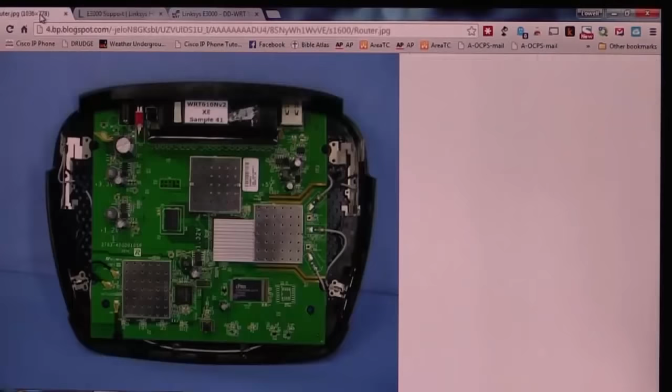So if you were to take it and crack it open, you take the 4 screws out of the back, this is what's actually inside. What we have here is a series of antennas. Over here we actually have 3 antennas, and they look very flimsy and cheap, and they are, but believe it or not, there is a tremendous amount of science and engineering that goes into their specific design.

So although they're just stamped metal with attachments, they are very thoughtful, carefully engineered pieces of metal that function as very precise antennas. We have antennas for the 2.4 gigahertz frequency range, and antennas for the 5 gigahertz range. Inside also, you've got a couple of metal shielded areas on the circuit board, capacitors, inductors and a couple of other things.

You got a Broadcom chip here that takes care of the switch, a 4-port switch. There's also an embedded chip here that's got Linux embedded. This is much like your firmware on your motherboard. It also has another chip designed for the 5 and 2.4 gigahertz radio. Here you can see the leads coming in. You got 3 leads coming in.

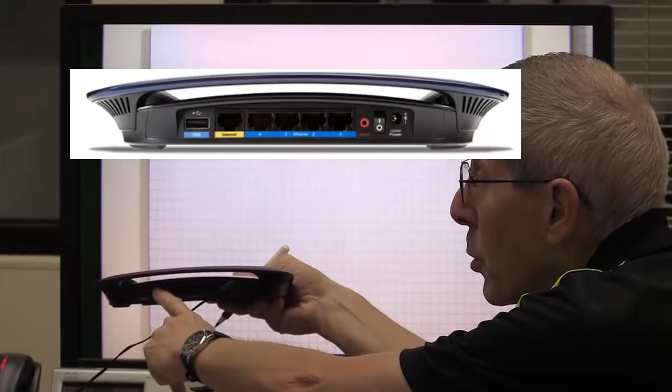Let me identify it. This yellow connector is what we call the internet connection. Most of the things I'm going to draw on this piece of paper are all inside. You can't hold it up or twist it around and see them. One of the things you can see is this port right here, and I'm going to identify that as I begin to draw. So one way I could draw this device is like a server.

In reality, this is a server with two network cards. This is a NIC, and this is a NIC, and this is a Linux server. Everybody okay? This is the internet connection right here. When I point to this network card, I'm really talking about that yellow internet connection. Inside the Linux is all kinds of functionality, and we're going to get into that. Then on the other network card, we go out and we have a switch.

And I want you to look very, very carefully when I draw this switch. Let's say this is 1 port, 2 port, 3 port, 4 port. And you're going to notice, in my crude artistic talent, I have drawn 4 ports on the switch, but I'm going to show you there are many more ports, but they are not visible and not accessible to you.

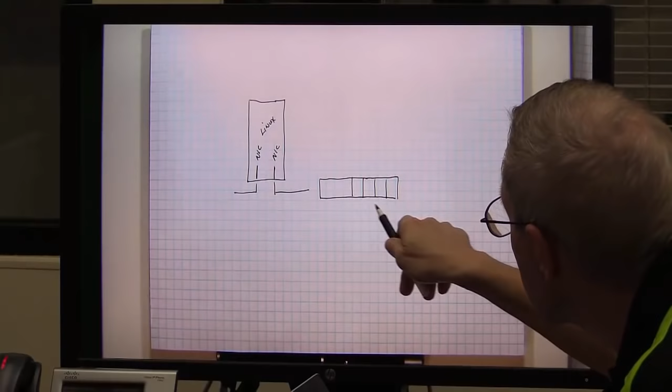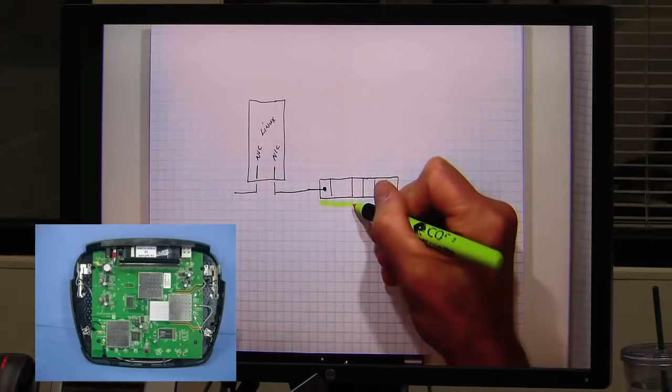So the Broadcom chip that allows us to have this switch, it has many other ports, but they're connected to other devices. So one of those is connected right here. So we've got a patch cable from this NIC to this switch port. This one you don't see. So all of these switch ports that I'm going to draw right up to there, you do not see these, okay? They're internal. Everybody there? They're there, believe me, if we go trace the circuit board, we can find them.

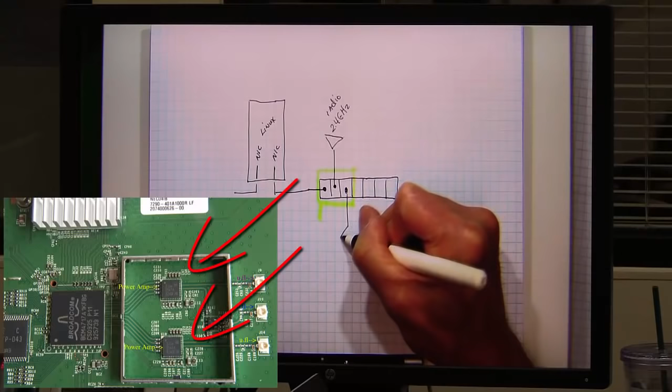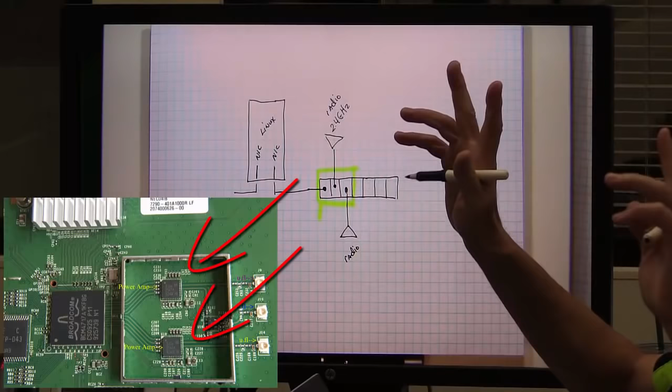The other is we're going to have a 2.4 gigahertz radio. And we're going to have what? A 5 gigahertz radio. Yes, we are. We're going to have two radios, and this is very typical with most multifunction devices you buy today; they come with what they call dual band. What does that mean? That means you have 2 radios. So this is a 5 gigahertz radio.

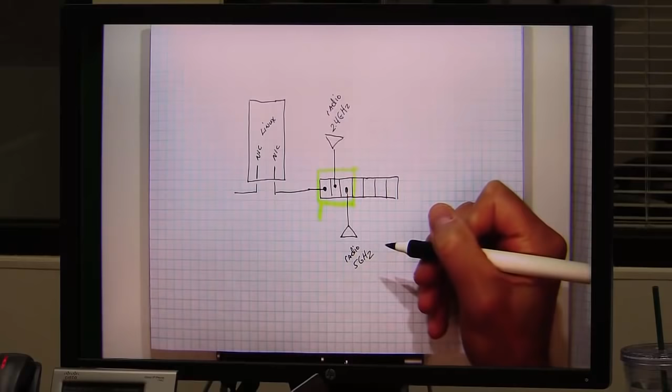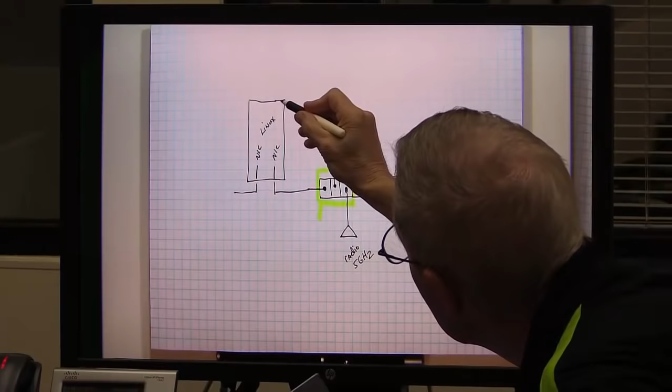So in reality, you have wireless access points or radios, you have a switch, and then you have a fully functioning Linux operating system. And a lot of our functionality is going to happen right there in Linux. Then we have 2 network cards, and this is where we connect. We will connect to our ISP box. Let's say this is the box that the ISP brings in. This could be Bright House, this could be Comcast, this could be CenturyLink. So it could be a number of ISPs.

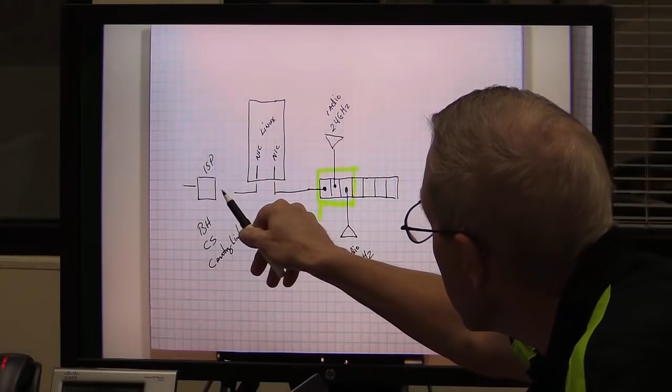They're going to bring some kind of device to you, and you're going to connect an RJ45 to their box and then to the first NIC of this Linux server. And that is represented by that internet port right there, okay? So I want you to understand, in reality, that drawing is more accurate than any other drawings that I'm going to do. But you still don't really understand it. But that is really what you got. Inside that plastic box, that's it. Now, inside Linux is going to be a lot of additional functionality.

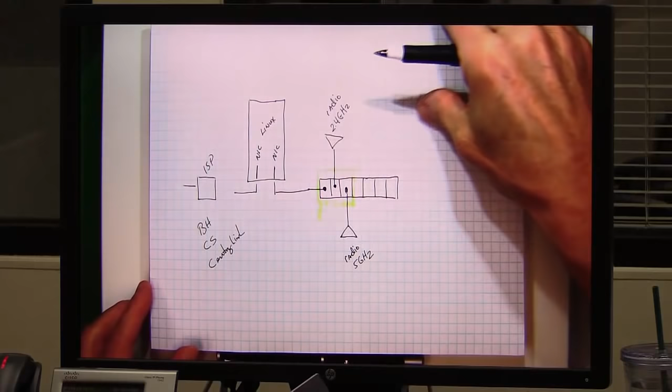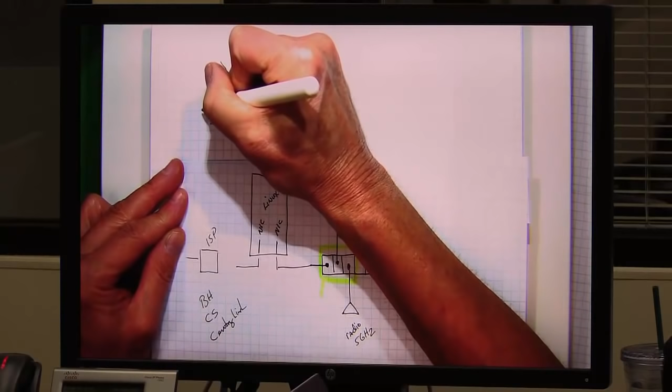So let me break down what's happening inside the Linux server, if I may. I'm going to keep this here so you can still see it. And I'm going to start drawing in more detail logical blocks. So number one, we have a router. Everyone understood that there's definitely a router involved, but prior to the router is a firewall. Then there is a router. And this, by the way, is our yellow internet connection point. Out of the router, we have a DHCP server.

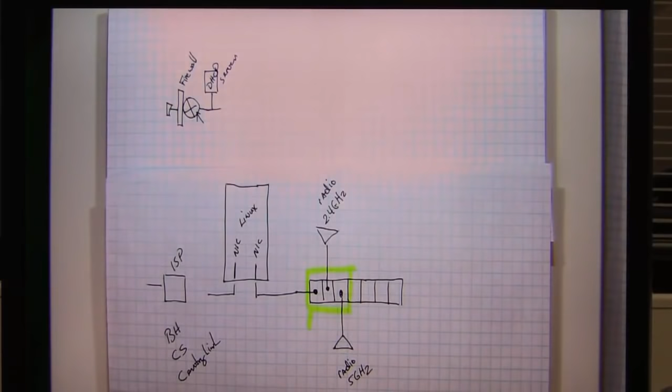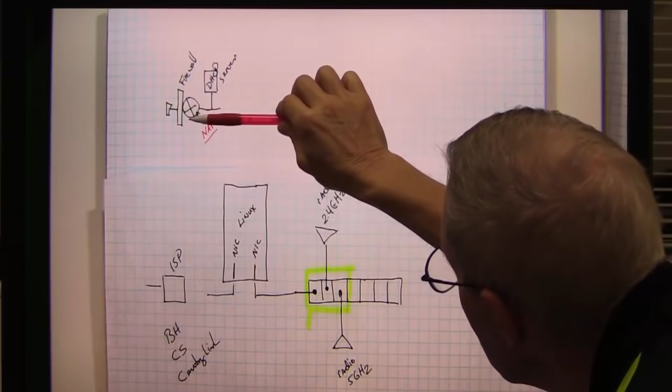We also have functionality inside this. Let me change colors, that will help just a little bit. Inside the router is also our NAT, our network address translation table. So inside this Linux operating system, we're gonna have a firewall, a router, a network address translation table, and a DHCP server. All of that functionality that I just showed you logically is where? Right inside that Linux operating system.

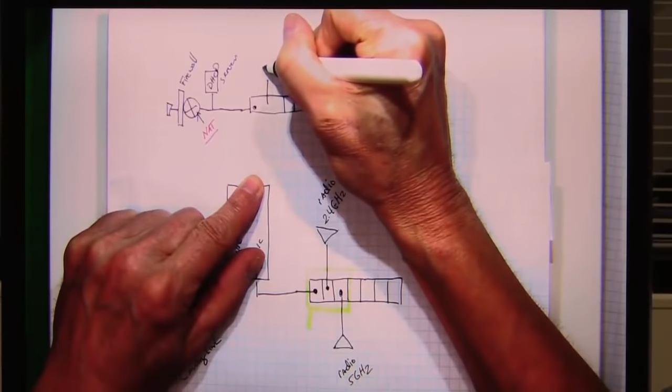Then we're going to get into our switch. Again, 4 ports are exposed so you can see them. The rest of those switch ports you don't see. This is the 2.4 radio. This is a 5 gigahertz radio. And so now I've broken the multifunction device into even more logical construction. All of this functionality is actually part of the Linux operating system. And this is embedded Linux. So really everything that I show here is all inside that Linux operating system.

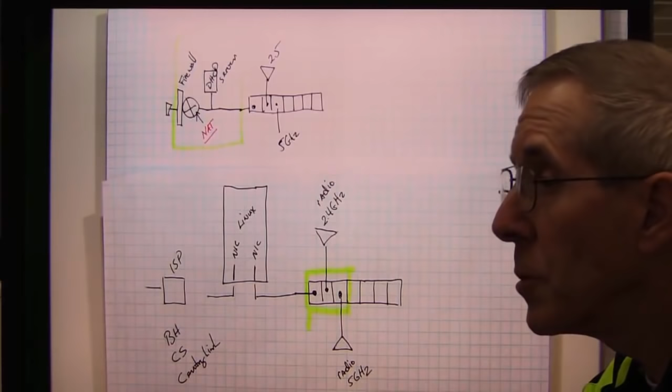So you can see we're talking about a firewall, a router, network address translation, DHCP server, a fully functional switch. This is a layer 2 switch. We see 2 radios, and that is what you buy for $90. It's all built in. It's incredible.

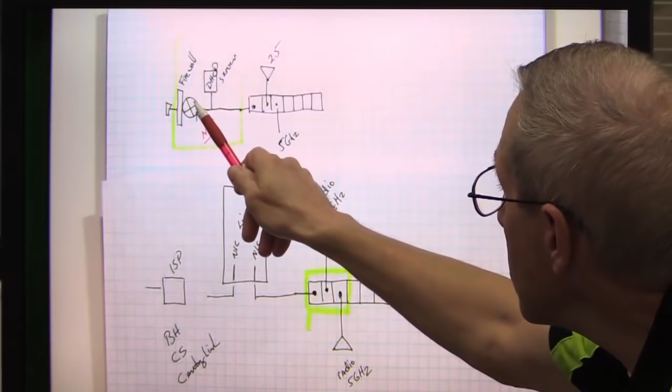Now, we have all of these pieces of equipment on our campus, but they're separate. In other words, we pay $3,000 for that device right there. Ouch. In fact, this functionality is built into our $3,000 router. So our DHCP server on this campus here at Winter Park Tech is actually built into our $3,000 router. And we have a lot more functionality in our router.

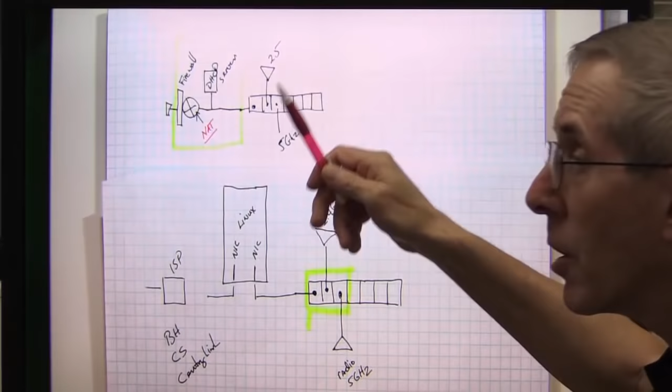Our switches are all over the campus, okay? Our cheapest switches probably start at about $3 grand each. And we have probably 30, okay? Chunk of change. So our switches run about $3,000 a pop. They're usually 24 port, 48 port, depending on the one you buy. Our wireless access points are individual. We have them up on the ceiling in the lab.

So whereas when you buy this, you're buying a multi-function device with a lot of the same components that we have on this campus, but they're integrated, manufactured at an extremely low cost, and given to you. Now, here's the beauty of all of this.

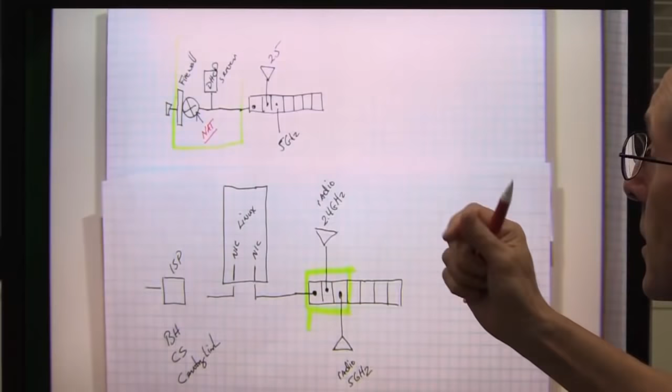If we would walk back in time 15 years ago, you guys didn't have this. You really couldn't study networking at home. Guess what? Now, with a multifunction device like this, you can study networking as much at home as you do here in this campus. That is a huge leap for the student technician who really wants to start understanding networking. How do wireless access points work? How do DHCP servers work?

Because 15 years ago, you couldn't have this, okay? 15 years ago, you were dialing up to AOL, okay? I remember that. 15 years ago, you were dialing up to AOL and you were happy. I would not be happy today to dial up to AOL. So today, you actually have all the major components that today's basic network systems have, and you have it for $90. Or if you're real cheap like me, you can buy it used or refurbished at half that price.

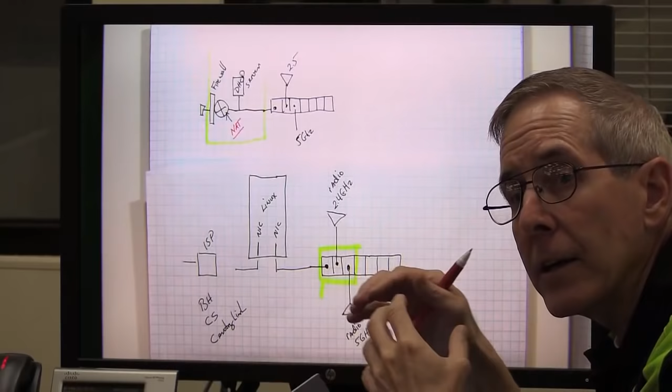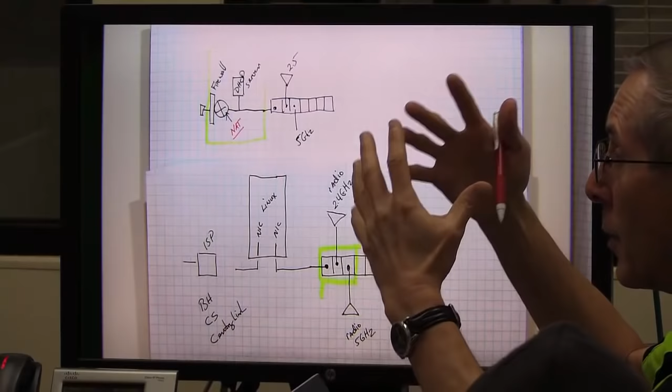So what was very difficult for you to study and learn and grasp 15 years ago is now something you can do very readily with very inexpensive components. So now I'm going to talk a little bit about these components, and then tomorrow we're going to start delving into the software. How do I look at the software so that I understand what component I'm working on and what component I'm dealing with? So let's take a look. I'm going to go back up to my

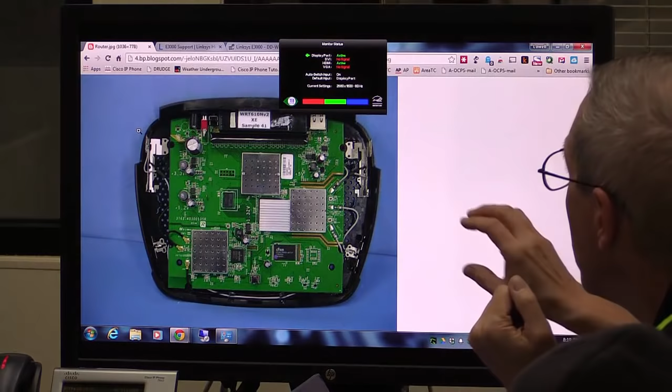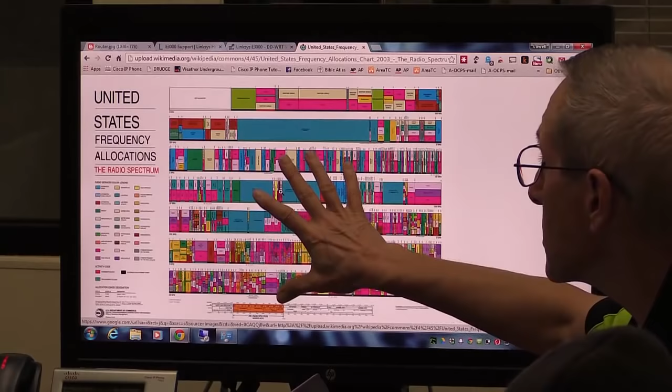Those antennas from radio, they have specific functions. I mean that they are different frequencies because of something, right? That is correct. So there's a frequency spectrum. So if we go look at radio spectrum, here's the United States. Let's go view the image. This is all the spectrum of radio transmission that is allowed in the United States. And notice it's pretty carved up.

If you look at this legend over here, you would see that the red is mostly probably the U.S. government. The military owns a huge amount of spectrum. There are slices of radio spectrum that are given to the public. Very little is given to what we call unlicensed public spectrum. In fact, 2.4 and 5 gigahertz are one of the few areas on the radio spectrum that are unlicensed. You don't have to have an FCC license to work on the gear, to set it up and configure it. Anybody who works on these other frequency spectrums must be an FCC licensed technician.

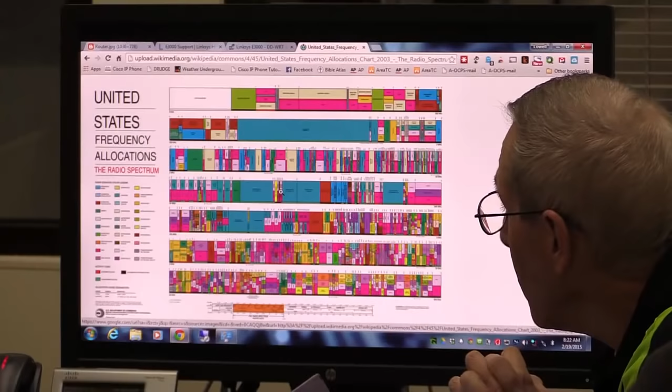You get to work on 2.4 and 5 gigahertz frequency spectrums where they're unlicensed and unregulated and open to the public. So radio control planes, drones, everybody in the world is in your 2.4 or 5 gigahertz spectrum. So in that radio spectrum is where we can transmit radio. Everybody else is either owned by the government or buys it. AT&T owns a chunk of this, T-Mobile owns a chunk, Sprint owns a chunk. But out of the spectrum you can use, they own very little, and they pay big bucks to own it. Most of that is U.S. government, satellite, weather. The Defense Department owns probably 80% of all spectrum. Okay?

So those antennas that we're looking at are precisely designed. I mean, listen guys, the guys who designed this stamped metal are brilliant people. When you talk about an antenna engineer, you're talking about one of those species of humans that, go look at an RF Engineer magazine and look at the math, the stuff that they talk about. It's way above the normal human being. These guys are bright. Just because they make it out of stamped metal and extremely cheap doesn't mean it's not incredibly bright people designing it.

So these are designed precisely for 5 gigahertz and 2.4. And although they're made of stamped metal, trust me, every element of that design is very precisely done. Okay?

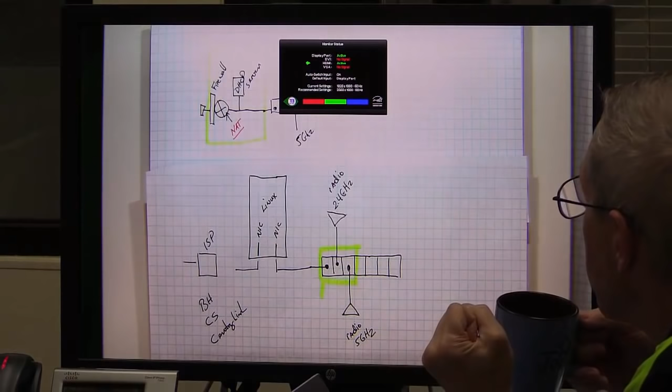You can see that we've got a couple radios. There's your switch. All your antennas are internal. It's got a 4 gig switch port that's available from the outside, and it has a USB, and we'll talk about that in a little bit. So that is the functionality. That's what's going on inside. So before I go on, let's go take a look at this. I just want to make sure that everyone feels comfortable with the drawing. Anything about this, come on, you can do it, I know you can. Anything about this that you'd like to ask questions?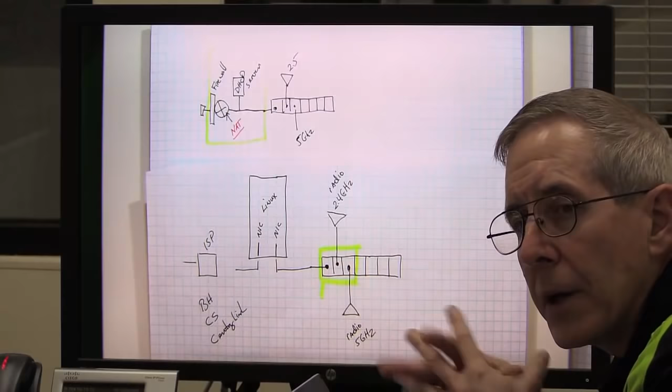So is it a good idea to unplug it, wait a little bit and plug it again to restart everything, or if it's working good, just leave it like it is? Great question. If I'm gonna go away for a week, I'm gonna probably unplug it. But generally, maybe once a month, unplug it, force it to reboot, force it to reset. But this Linux embedded operating system is so stable that you rarely have to reboot it. They use the same thing in the ISP box that you get from Bright House or CenturyLink; they use embedded Linux in that also. It's just a very, very stable operating system.

They use a very similar type of embedded Linux in this box that they use in this multifunction box. So generally, no, you don't really have to do anything. I just purchased a brand new multifunction device, and I'm having to reset it about every 4 or 5 days, which is very aggravating. That tells me something's wrong. So I gotta get it ready and I gotta ship it back. So you really should not have to reboot it or reset it, but just maybe once a month. I would do it just to flush it out and reinitialize everything.

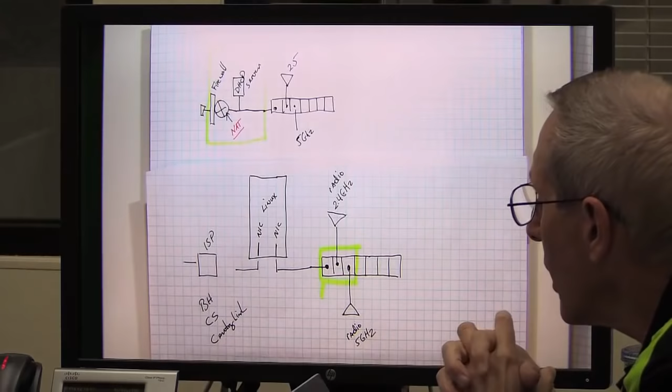Any other questions here? All right, so let's go back here. We talked about the OSI layer, and I want to show you where each of these components is in the OSI layer. This is the physical layer. This is the... I'm waiting. Data link layer. This is the... they're flying. I'm sorry. This is the network layer. This is the transport layer. This is the session layer. Presentation. Very good. We're getting it, slowly. And our application. So this is our OSI model, 7 layers.

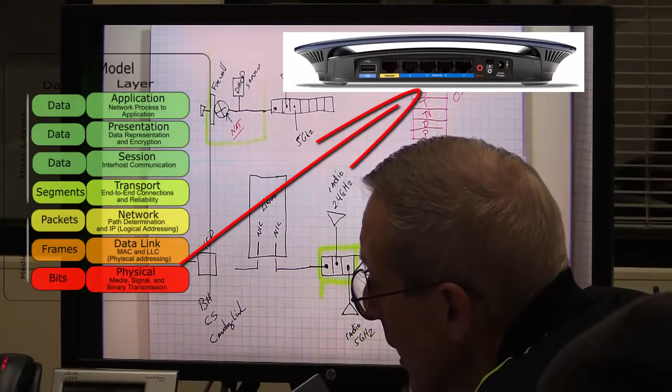This is physical. So I want you to look at this multifunction device and tell me what is at the physical layer. Hardware. Exactly. We see the jack right here. Everyone see that? So this jack would be at layer 1. What about these other jacks? Yeah, they're really at layer 1. All the jacks, the external jacks, are going to be at layer 1. So that type of stuff is going to be at our physical layer.

What about the data link layer? What components are at the data link layer? Okay, so let me help you a little bit. Network interface. All switches. So this is a switch. This is going to be found at the data link layer. This is a layer 2 device. So switches are layer 2 devices. Anything else at layer 2? I'm just throwing it out there. You're not supposed to know this. I'm just polling to see who.

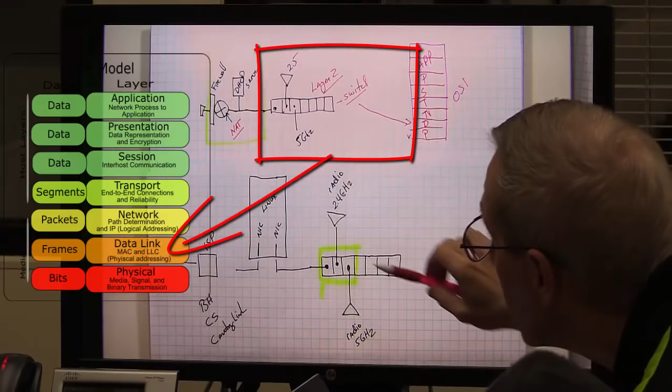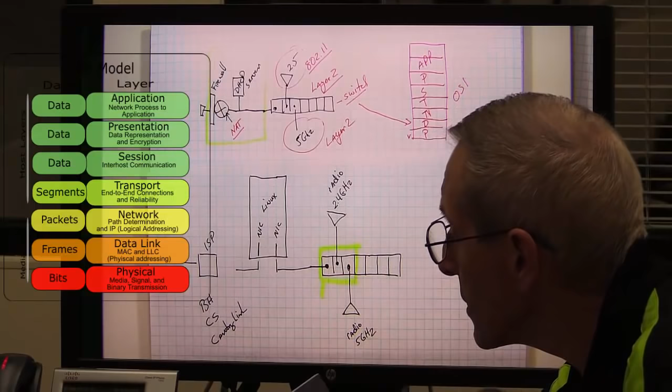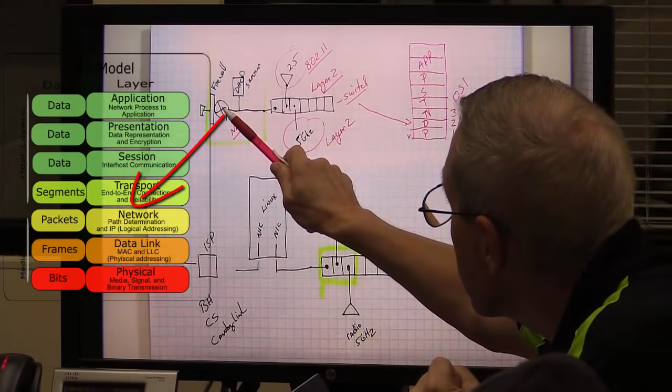Okay, another layer 2 device are those radios. Those radios are 802.11 standard. All of your radios are layer 2. So when you think of wireless, listen to me carefully. Wireless is layer 2. All your switches are layer 2. So physical: jacks, plugs, cables, all your Cat5 cables that you plug in, all of that's the physical layer. What about the network layer, layer 3? What's at layer 3? DHCP server. Not yet. Network interface. Let me tell you what definitely is layer 3, and that is your router. Your router is always going to be layer 3.

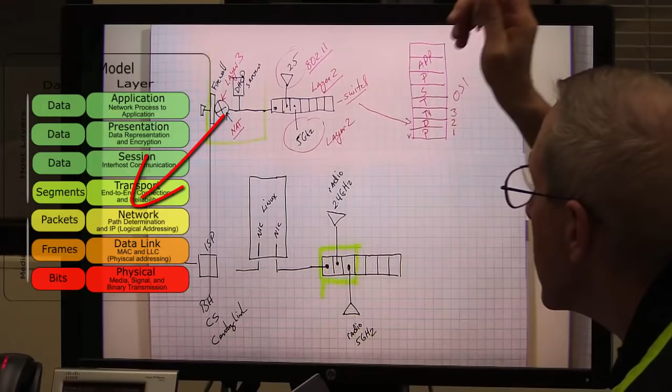Good question. A comment was, is NAT layer 3? You know, that's a great question. Where do you think the firewall is in the OSI layer? Any guesses? Session. Application. Actually, this particular firewall that's in your typical home router, your typical home multifunction device, is going to be a multi-layered device that's going to cover from data link layer to application. So you're going to be able to control what goes in the data link layer, the network layer, the transport layer, the session layer, the presentation, and the application. So this firewall is pretty inclusive. So when we look at the various logical components, that's where they fit in the layers of the OSI.

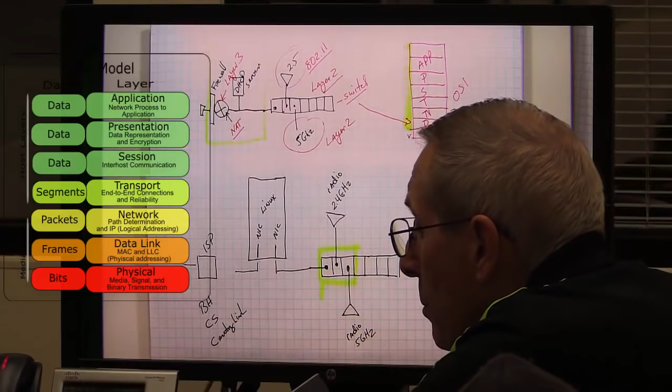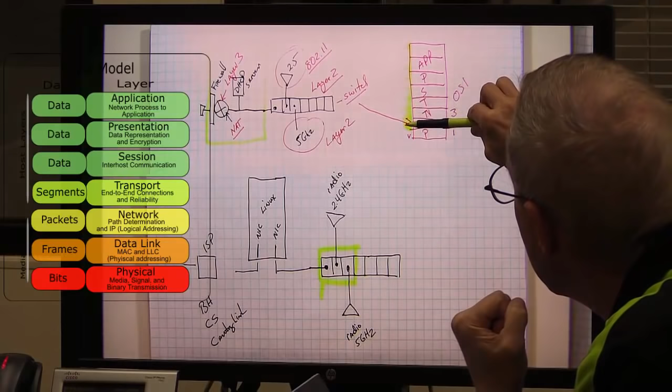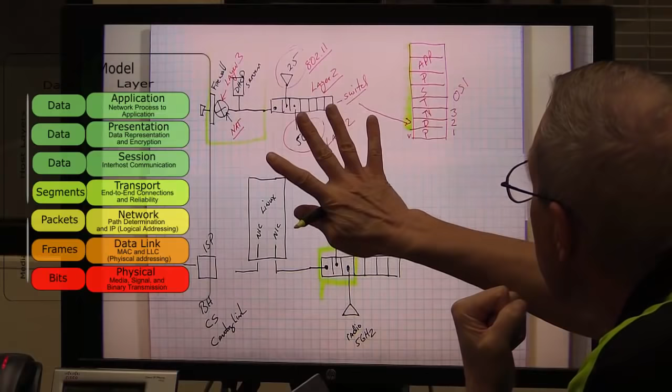Data link layer plays a big role in the multifunction devices because it represents the switch that's actually behind those connectors, and those access points. We call these WAPs, wireless access points. So layer 2 is switches, access points. Layer 3 is definitely the router. Remember, router is going to be layer 3. As we get into the other functionalities, firewall spans a number of layers from data link layer all the way up to application. So it is going to allow you to control what goes in at those various layers. And that is a good picture of most of these devices.

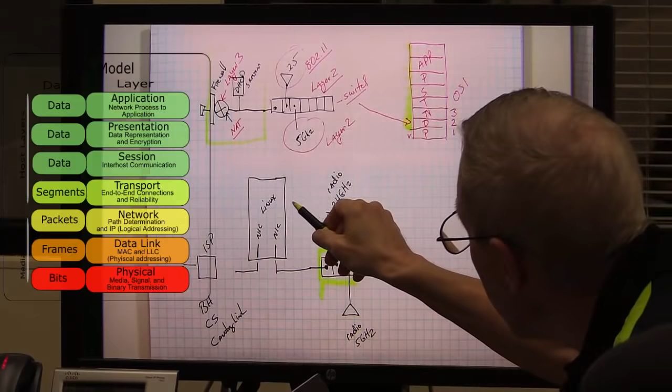Now, today, because Linux is the main operating system that's running typical multifunction devices, as vendors try to compete one against another, they're adding more and more Linux functionality to your home router, okay? So since they're using Linux, and Linux has lots of functionality and features, one of the ways that I can differentiate my router from brand X is I begin to add more Linux functionality to your home router.

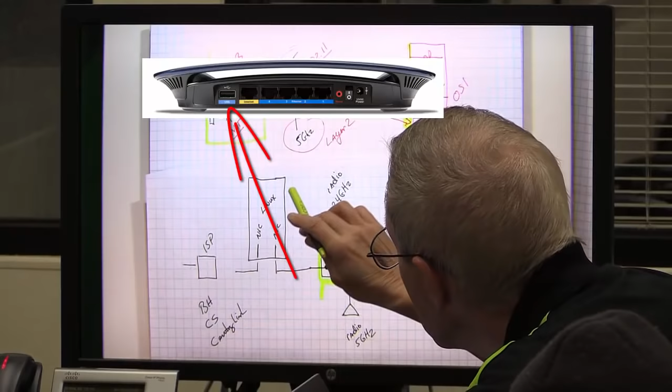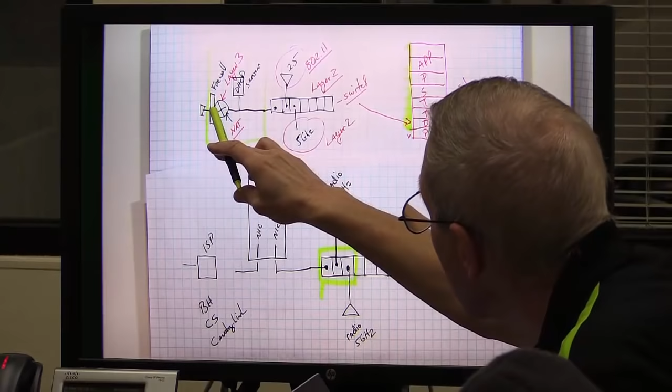This is where the USB device connector is. These devices give you the ability to take Linux and get all this functionality, a DHCP server, a firewall, a router, and now they're also going to produce a Windows server. So we use Linux to create a Windows server. I can plug an external hard drive right here, put my videos and music on it, hang it off the side of this router, and everyone in the home can access those files just like a server does. Remember servers and shares?

We're going to tell Linux, I want you to act like a Windows server. How do they do that? We talked about this before. How does Linux act like a Windows server? What does Samba do? Samba is an open source software that, when you install it on Linux, makes it look just like Windows.

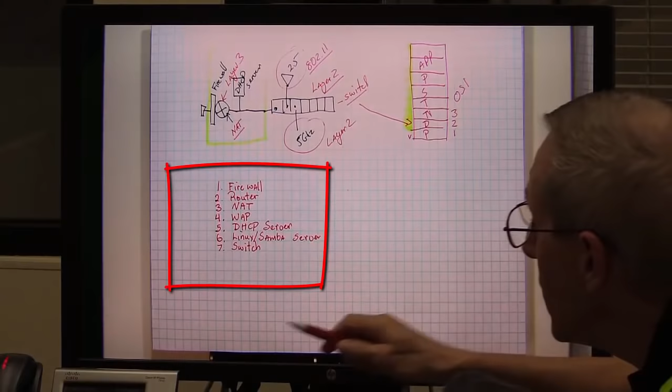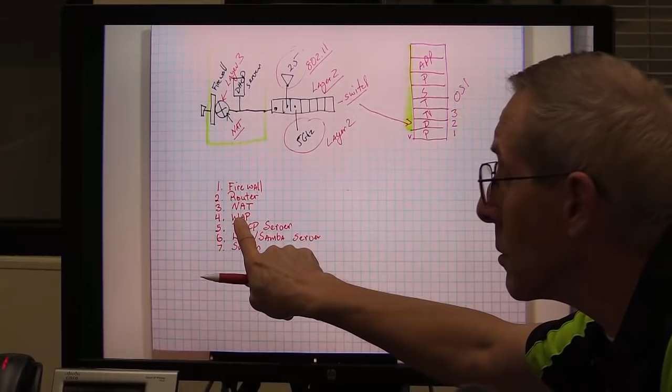So that is the logical components in your typical multi-function device. Now, depending on the price you pay, you may get better functionality in these areas. So if you buy the latest, greatest ASUS router, multifunction device, you may get a much better radio, a much better access point.

If you buy less expensive ones, for example, I buy at least one very inexpensive multifunction device, and I just keep it as a spare. So if my one that I live and breathe and die on dies, I can take my cheap one and stick it in temporarily till I can go out and get one. Otherwise, my wife would kill me. She can't have her iPad, I'm dead meat. So I've got a spare ready to go. It's all set up and configured. All I gotta do is plug it in and go.

How long do you normally keep those for? That's a great question. I probably wouldn't keep them any more than 3 years, because in a 3-year period of time, the radio technology, the router technology, the Linux technology has so radically improved and changed, it's worth it to buy a new one.

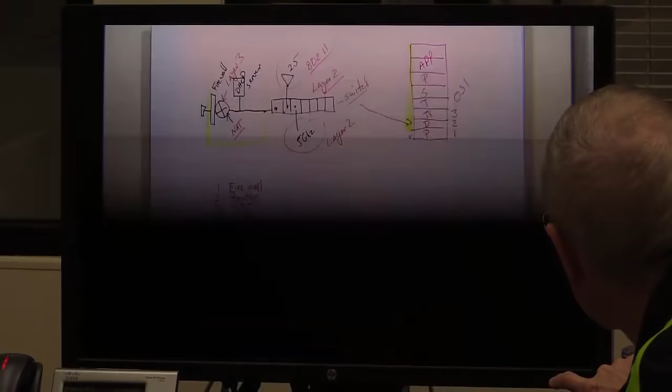Now, let me ask you another question. How do I go out and choose the ones I buy? Yeah, I do reviews. I'm going to go to reviews, and I talked about that. So when I go buy a device, and I don't care what kind of device it is, let me show you how I go buy devices. Mr. Interval does not know everything. I need the experts that are out there that do the reviews, that look at this equipment. So I typically will go to, one of my favorite is CNET, because they really focus on reviewing consumer products, and this is considered a consumer product.

So I will go look at the top routers out there. I'll go take a look at them, and I'll look at the reviews. And generally, when they review them, I will look at the top 3, and I will say, what can I afford? Because some of them are beyond what I want to pay. I don't want to pay $280 for a top-notch router. But number 3 was rated very good, had a lot of great features, and was well liked by the reviewer. Okay, then I go find the best price I can buy it, and that's how I buy everything.

Everything. I go to people that are experts. I look at their reviews, and then from the experts, I figure out what price range I can buy. Then I go search for the best price. And I buy everything, guys—cameras, Blu-rays. I don't know all this stuff, so I go to the experts. Based on their reviews, I look at what I can afford, and from that, go find the best price. And I rarely get burned. I mean, I've been burned a couple times, but generally I'm very satisfied with that process.